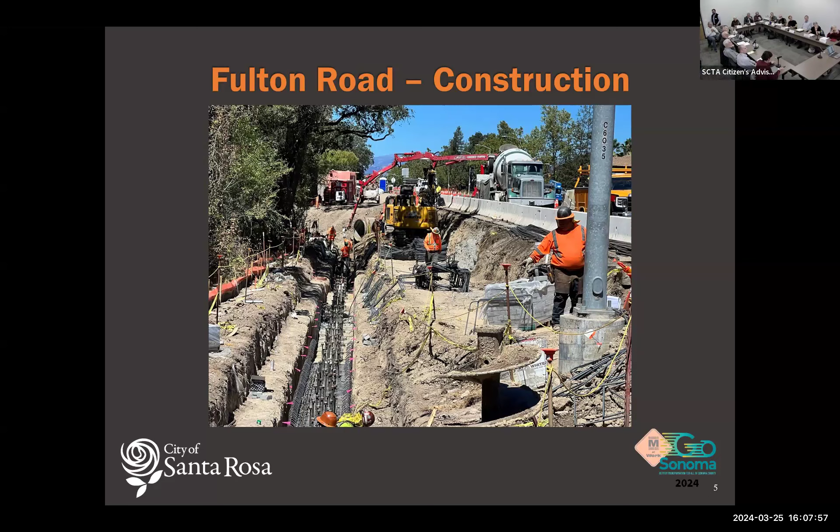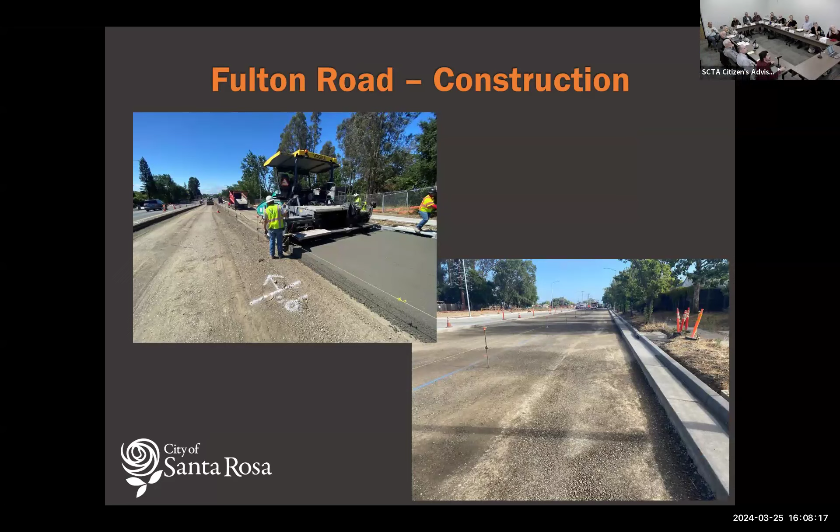This is what RCC looks like when it's being placed, up in the upper left corner. It comes out more like asphalt rather than concrete, but it hardens just like normal concrete. So yeah, that's kind of what it looks like. The lower right is just the grade with new curb and gutters.

Here's a curb ramp being built. There were 47 curb ramps installed or upgraded to ADA standards across the project.

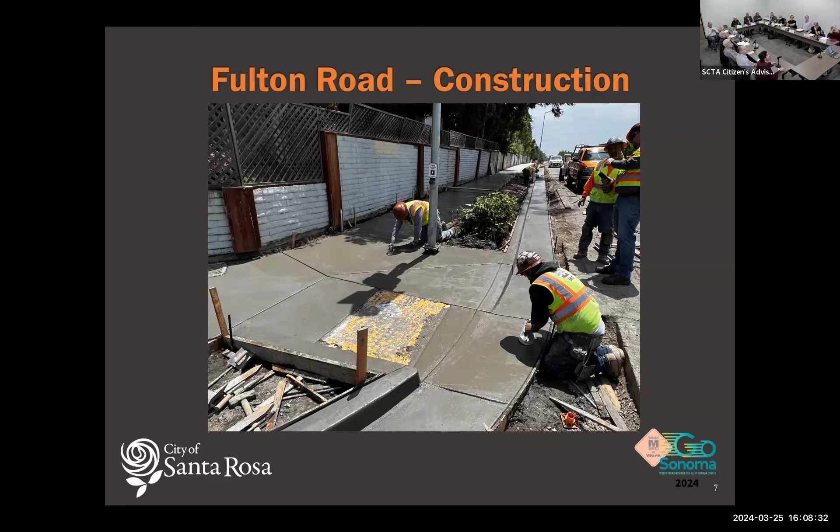This kind of shows the road partially built, but mainly that LID portion of it. When the project's complete, there'll be trees planted in there, it'll be nice and green. And that kind of shows how far away from vehicles the pedestrians are. Prior to this, they were right next to the road, and a portion of this didn't even have a sidewalk.

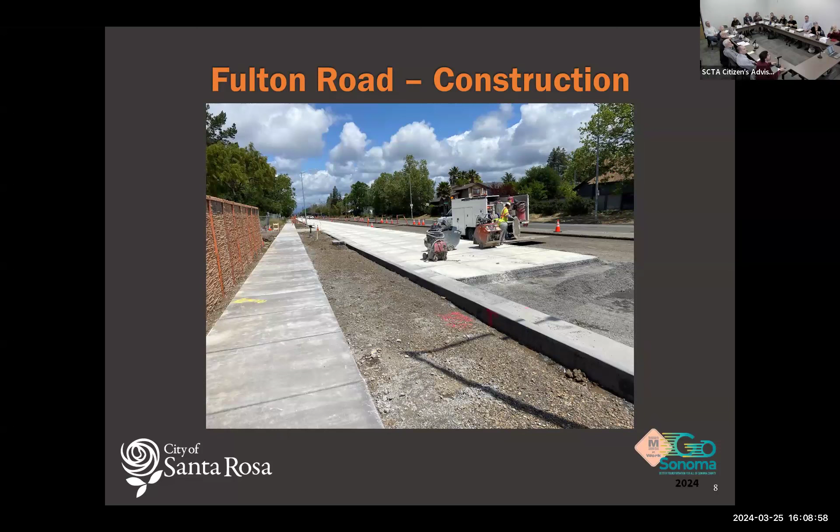This shows some permeable concrete, which allows water to go through the concrete and into the LID area. Down in the lower left, there's kind of an alternate design where there are curb cuts that allow the water to go into the LID area, and then it gets filtered and recharges the groundwater.

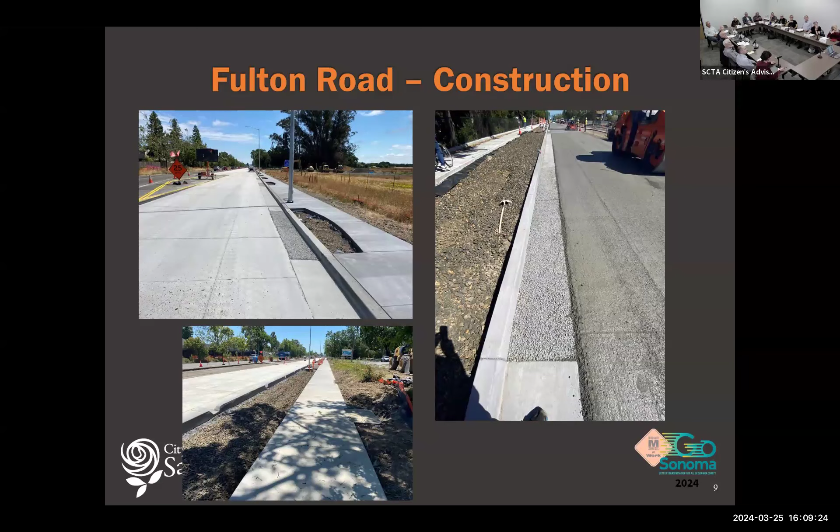You want to take questions as we go or at the end? Questions doesn't go, so I think, yeah. Don't know what you're getting into, but give it a shot. Go ahead. I think Rick was up first.

You didn't say anything about what we've just been reading in the Press Democrat the last few days about a lot of this concrete having been torn out and replaced. I mentioned right at the opening we're proceeding with repairs, but I can touch more on it if you'd like.

Essentially, our contractor proceeded with the RCC and most of it didn't meet our spec. They had grade going the wrong way, so it was draining into the road. Some of the thickness didn't meet our spec, so all that has to be torn out. Another portion had raveling, where it degrades slowly over time from vehicle traffic, and one of the intersections actually looked like it had gravel all over the place because the road was falling apart, due to their installation being incorrect. So we've been fighting back and forth, and it's been a huge ordeal. This is my first construction project for the city.

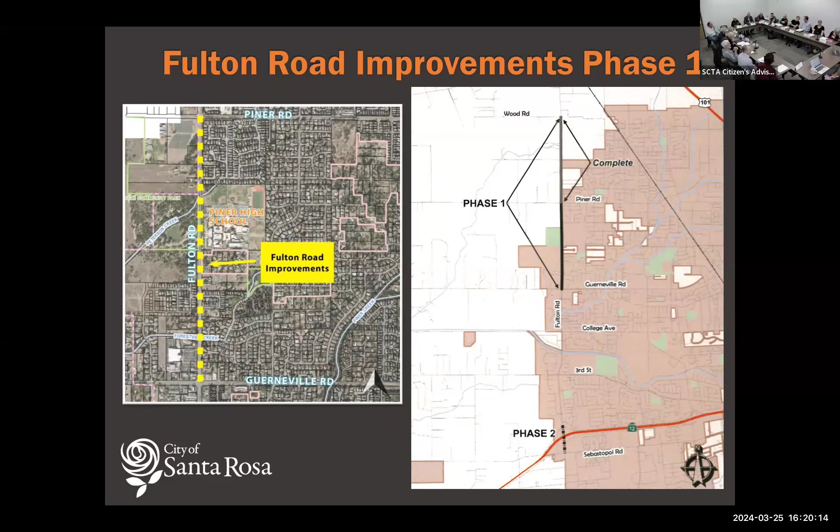We're also looking at other opportunities for what we could use that section for, if it stays in the general plan or if we don't have money to do the actual roadway. Is there an opportunity - which I think there is - to put a bike and ped facility along that segment to connect over to Bennett Valley Road, which will eventually connect to the Southeast Greenway. That would make a great connection all the way to Yolanda. Our hope is also to connect from Yolanda over to the Hearn interchange, which has a separated bikeway, and down to the SMART multi-use path. So big picture, that'd be a fantastic facility.

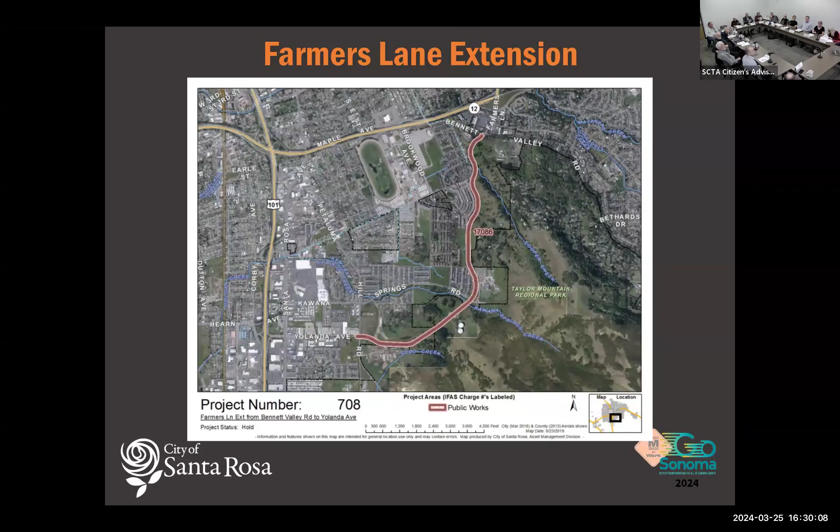Yeah, absolutely. Great, thank you. Any others on farmers? No.

Alicia, you're up next. You've been listening to us. Are you worried now? A little bit.

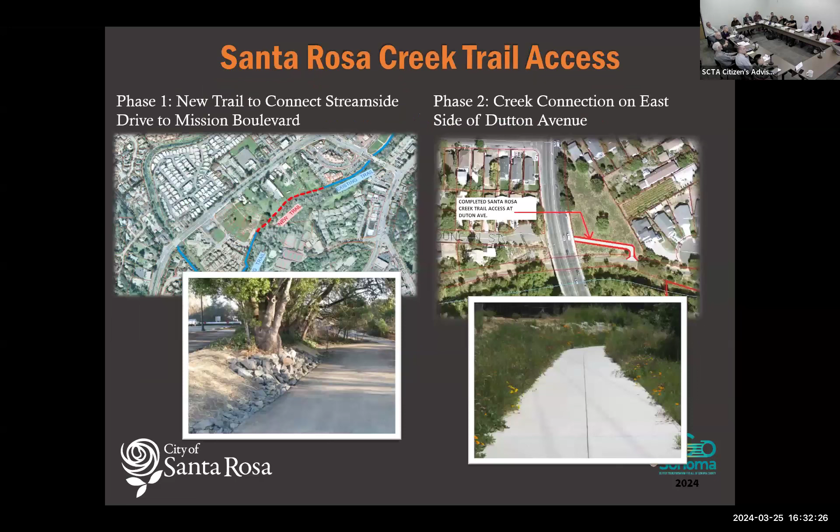Any questions on the Santa Rosa Creek Trail access? Yeah, Tim. Let's see. I don't know if I need a microphone. If I'm sitting over here, but I'll talk so I can pick it up. Sorry. Make sure it's turned on. Hello, can you hear me?

Good. Okay. I love the creek trails around Santa Rosa. This is actually more of an interest of mine, in the sense of who originally started building these and who maintains them? Because I notice each city seems to have their own set of how these are set up, so I'm curious how that works. I'm sorry, like who originally started building the creek trail system? Santa Rosa has, I think, one of the best ones in the county. Uh-huh. And then how do they get maintained and funded generally?

Take a stab at that. Okay, so I don't know, they're owned by the Sonoma County Water Agency, but I think we have an agreement with them to maintain and operate the paved side only of the creek trail system. So if it's a maintenance issue, then it lands on the city of Santa Rosa to maintain the asphalt part. But as far as how they began, I don't know. They've been there as long as I can remember. So they've been there quite a while.

And maybe I'll open that up, because from a mobility aspect and getting around, I think we kind of underuse our creeks and our creek trails. These are class 4 pathways, or class 3, I mixed up all the classes there. Easy to use pathways for bikes and peds. And it seems like we might prioritize some of that for future planning. And I don't know how.

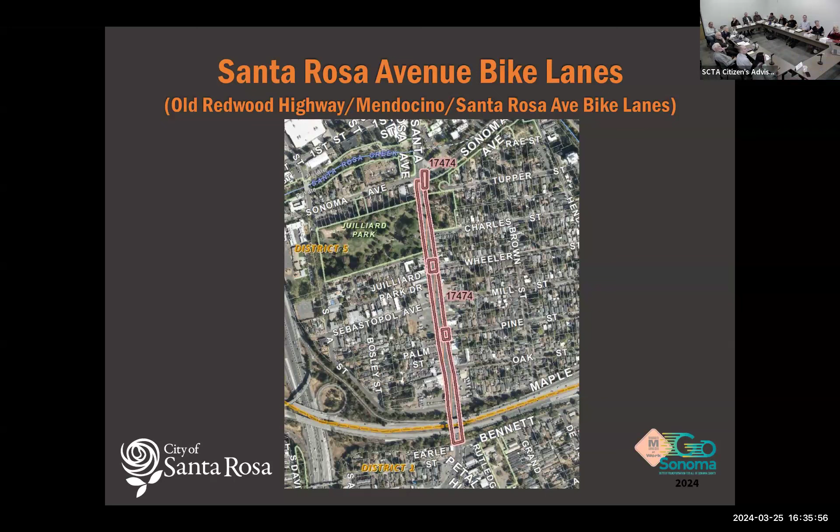This project in general improves our pedestrian facilities, bicycle facilities, vehicle and transit facilities, as well as some general beautification of the corridor into the downtown area.

As you can see in this little snippet, this is one stretch of the entire corridor, but we have some medians added in, which are going to have some nice landscaping in the middle for that beautification factor.

For our pedestrian facility upgrades, we upgraded all those to new ADA standards and added in some crosswalks, as you can see. On the north side we already had a flashing beacon, so we've added another one on the south side as well. This improves visibility for our pedestrian crosswalkers and allows them to safely cross.

Originally this stretch of road did not have a designated bike lane, so a lot of bicyclists were just riding in the road with traffic. Now, as you can see from the design, there's its own bike lane, class 2, which is going to help close the gap we had along Santa Rosa Avenue. In order to achieve that, we had to reduce the lanes. So this was originally two through lanes in each direction, and now it's a single lane.

For transit upgrades, we originally had two stops along both directions, north and south - one on the south side next to Highway 12, one in the middle around Sebastopol Avenue and Mill Street - but we had nothing on the north side. So pedestrians or transit users had to go all the way to the transit mall on 2nd Street or east towards D and E Street. There wasn't really that ease for them. So we have since added a bus stop at the corner of Sonoma Avenue and Santa Rosa Avenue.

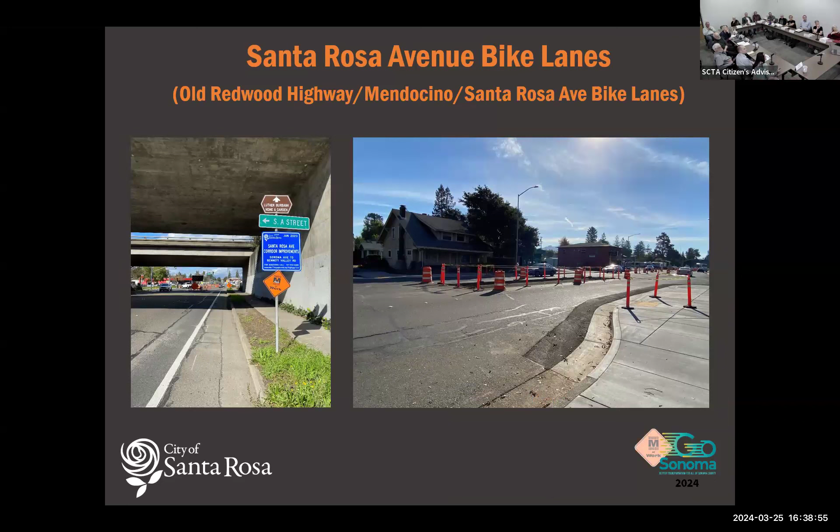One thing we really wanted to hone in on during traffic control from the beginning of construction was reducing that to a single lane, to help get our frequent drivers familiar with that. It takes a little grace period to really implement it, so from the beginning they've been using one lane.

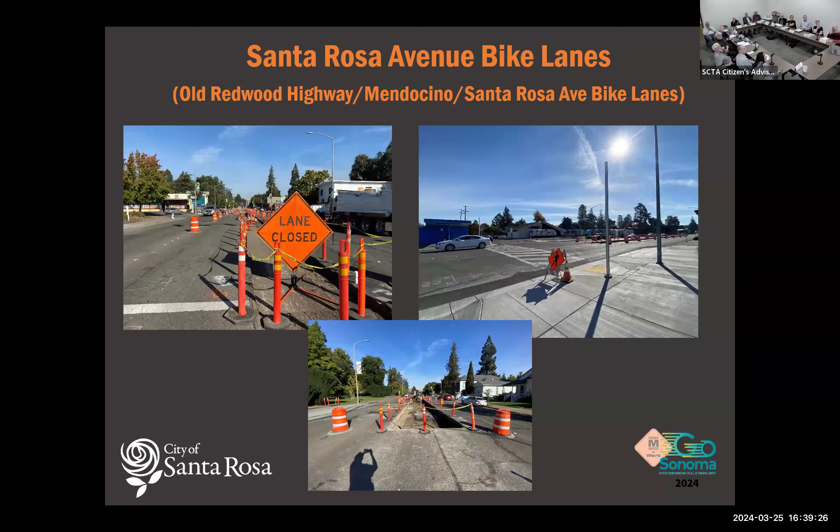Another curb ramp upgrade, and that was at an existing crosswalk, and again some more median work. And then here's the median installed now - very nice and clean. You can see some temporary striping in place.

This project is currently on hold for a winter suspension since we've been having these rains in and out. So we have temporary striping again, so we just don't have all those cones out there all the time. Our current resumption date is May 1st, and that's when we will finalize our pavement efforts, do some dig outs, topical slurry application, and then our final striping will be installed.

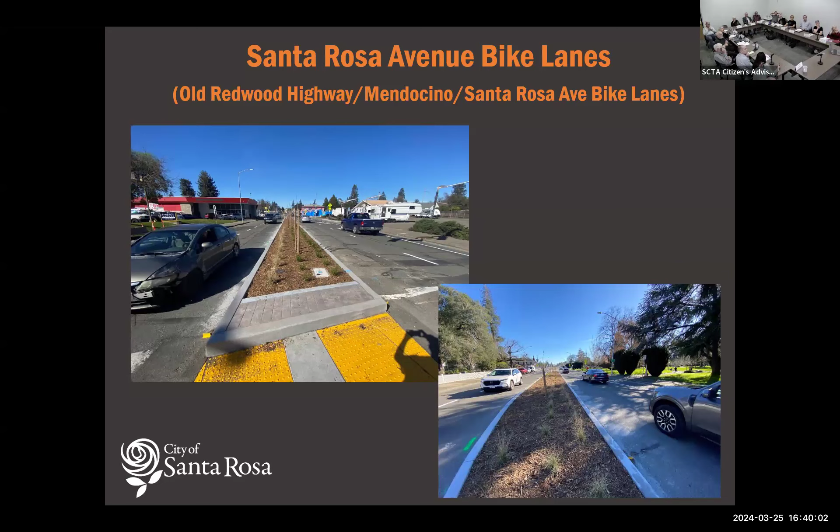Here's the schedule that we had for this project. Construction started in July of last year and was projected to end in December. We did have a lot of underground conflicts that we encountered, so that prolonged the project a little. Then it was winter, so the hope is just the paving efforts and we can be done by July of this year.

Here's the breakdown of our funding. We had $343,000 of Measure M funding, and we have been reimbursed for all of that. There's the breakdown of our local funds as well. And technically this is for all the slides, but we have a website where you can find more information on all the projects we've talked about today.

So have you found necking down from 2 lanes to 1 has increased delay time? Is there traffic jams? Is there queuing lines, or is it not really noticeable? At first, definitely some queuing lines, but I think that also had to do with the actual construction happening, all the cones, the people out there. I get texts from family and friends all the time about it, and I did get a nice one yesterday saying they can tell it's cleaned up more and it's not as backed up, but I think we'll have to see how it plays out. The hope is the traffic calming too, that it's not going to queue up, everybody's going to slow down to help with the bikes and the medians and all that.

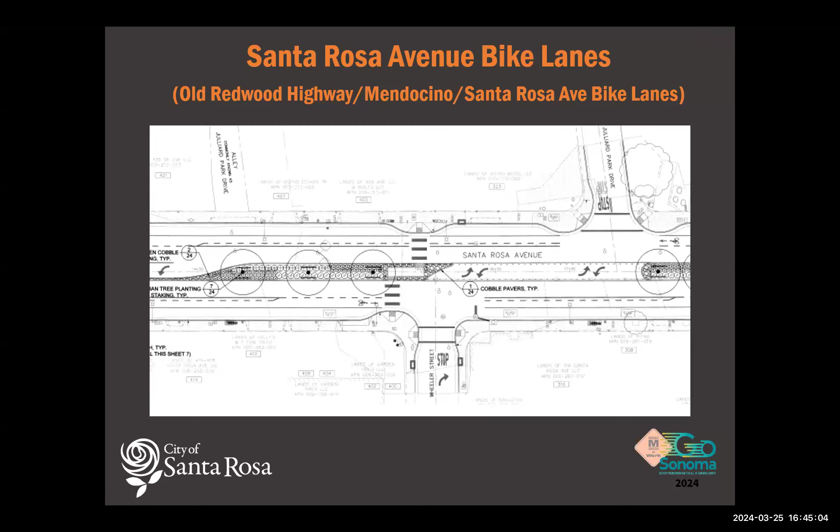We do, yes, so the fire department has been consulted with this, and even though we are reducing to 1 lane to add the bike lane, there's still room for current drivers to get out of the way. There's the parking areas on the side and the bike lane if they need to pull out so that the fire truck can go through. Okay, thank you.

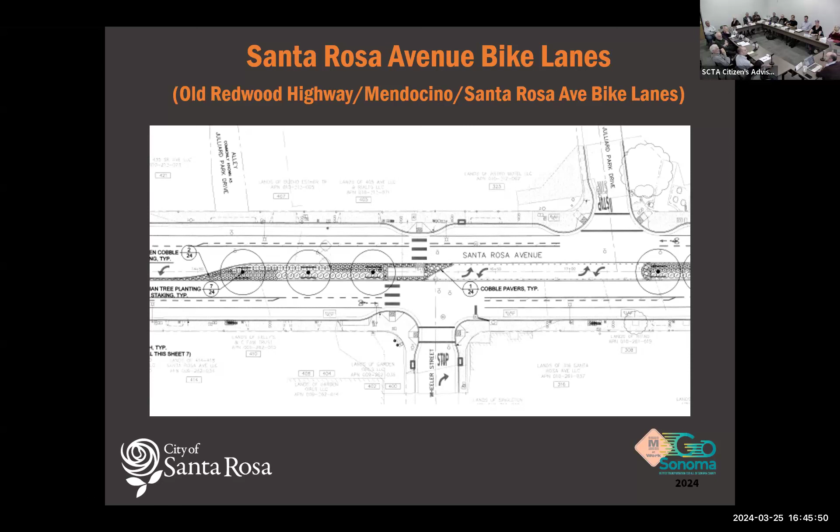Seeing no more hands raised. Thank you, nice report. Any other questions? That was enough, that was plenty.

Yeah, go ahead Steve. How are we doing on the Southwest Greenway? I'm not up to speed on that project, actually. Last I heard we're still working on it with Caltrans on acquiring it. So it's still in the process of the city acquiring this? Yeah, I'm not super familiar with the project though. I mean, I know what it is, I just don't have any up-to-date information personally on it. And so we don't do any of the specific planning until the acquisition is complete? There is planning being done, but again, it's just not a project I'm up to speed on. Okay.

And I just want to say, Rob Sprinkle, you are a rock star. I say this every chance I get to publicly give you accolades. And I like your team, they're great. Thank you very much. Thanks for having us. You bet.

And we're back to Shauna for some MOE stuff. My favorite things, otherwise known as maintenance of effort. So I think everybody in the room is familiar, but just in case.

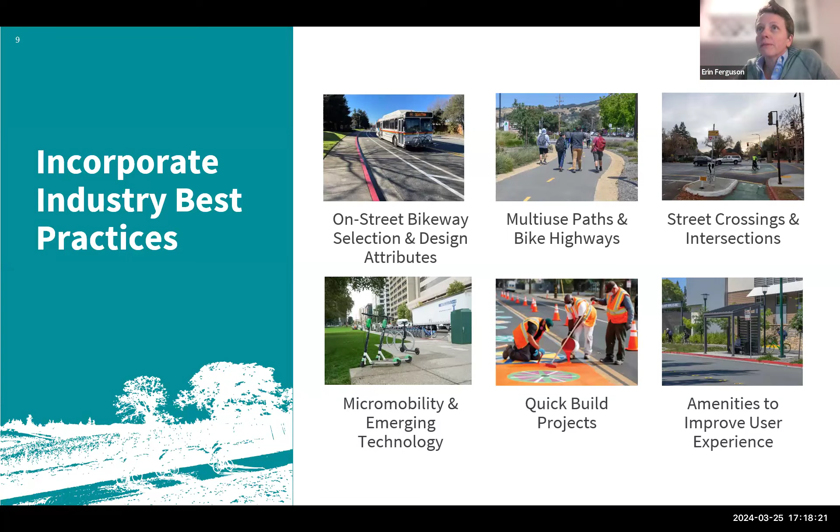So kind of continuing on, we have vision and goals for the plan that I'll touch on, because these two are foundational to understanding where our draft prioritization criteria have come from.